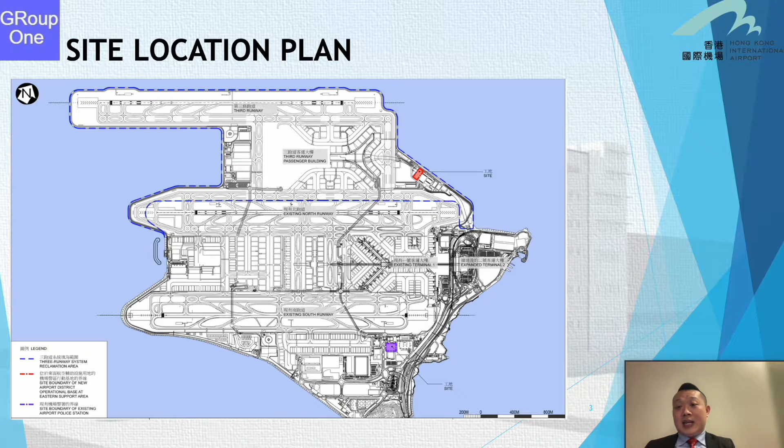I will introduce the project. Here you can see the project is located at the 3rd runway of Hong Kong Airport. Here is the location map.

Actually, to meet the growing air traffic demand and to maintain the competitiveness among different cities in the world, we need to build a new police operations center.

We are Group 1 construction company headquartered in Hong Kong. We specialize in various infrastructure projects. We have a well-reputed history and a well-structured organization, including the BIM teams and robotic teams.

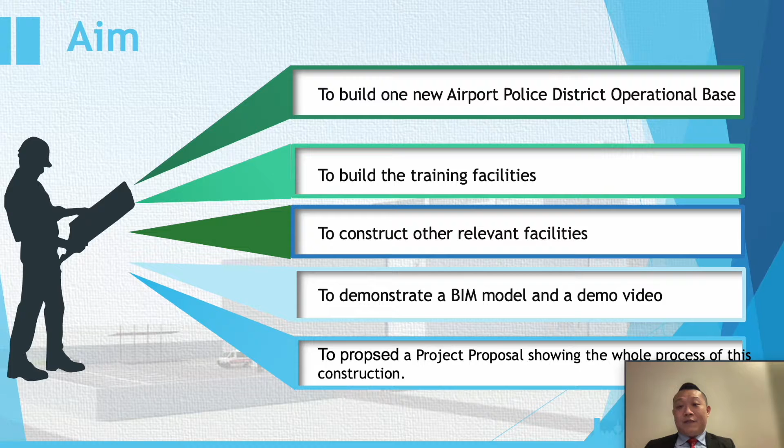Here is the aim of our project, which has 5 parts. And Marco will talk about the literature review.

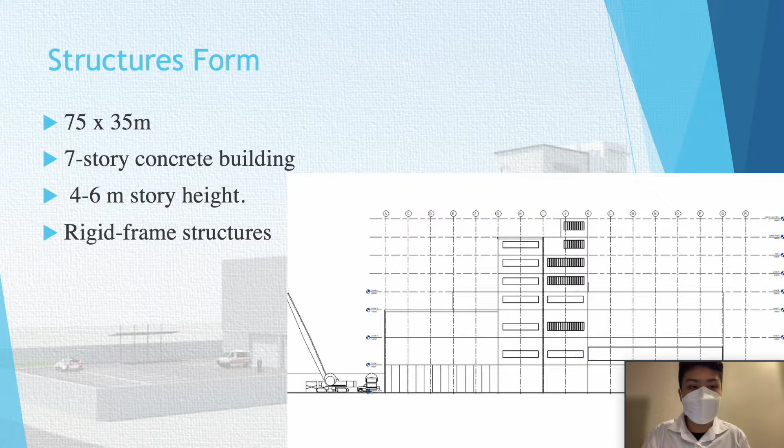Hello everyone, let me talk about the literature review. For the construction form, we suggest constructing a 7-story building. The construction method will be suggesting using the rigid frame structure.

The schedule management assigns dates to project activity, also including matching equipment, material and labor resources to project work. Also, our analysis method would be the critical path method.

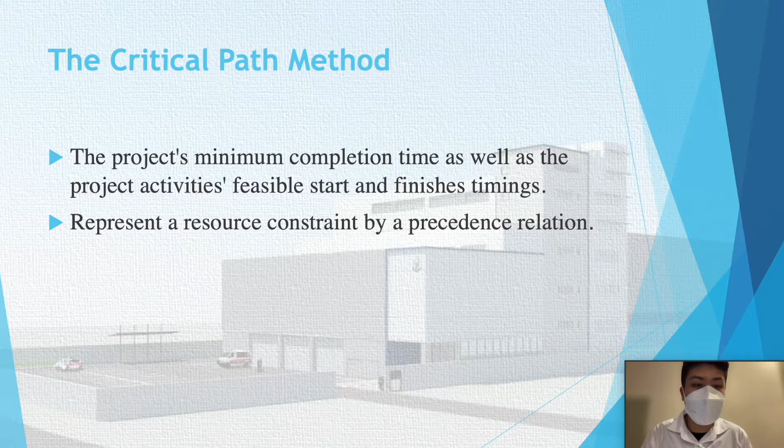Let's talk about the critical path method. This method determines the project's minimum completion time as well as the project activity start and finish time. Also, it can represent resources constrained by precedence relation.

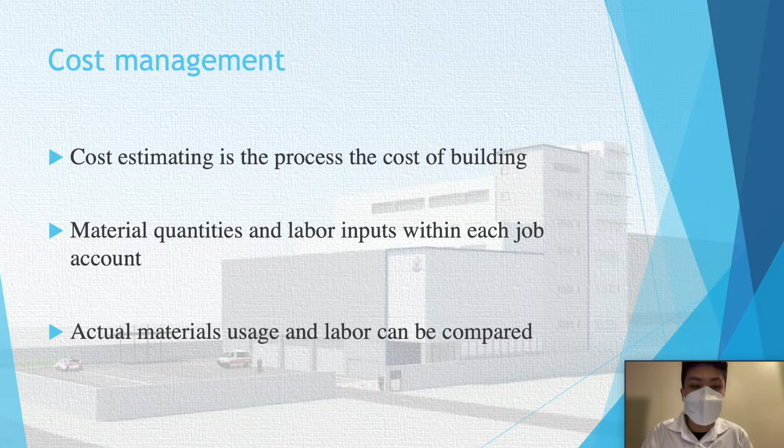Cost estimation is the process of estimating the cost of the building. Also, the information on material quantity and labor input within each job account is typically retained in the project budget. In this project, BIM will be used to build up a 3D model to demonstrate the construction details.

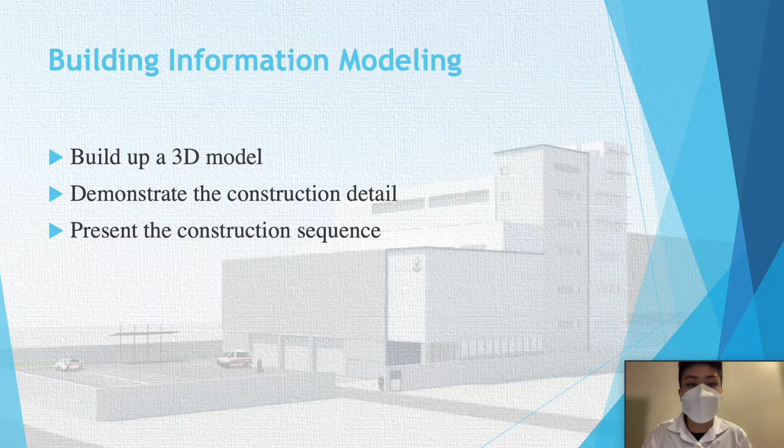and use the video to present the construction sequence. According to the regulation of the development department in 2018, we must adopt BIM in the design and construction of the project if the project is more than $30 million.

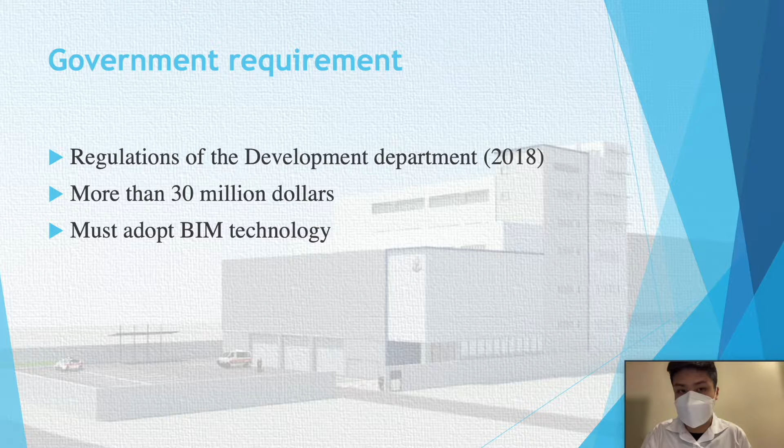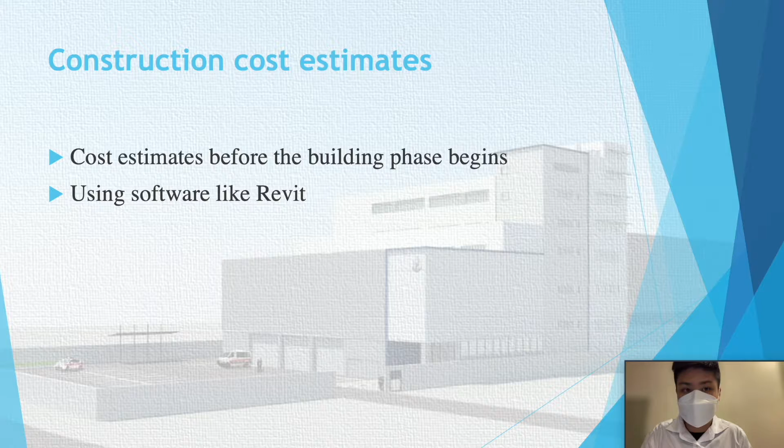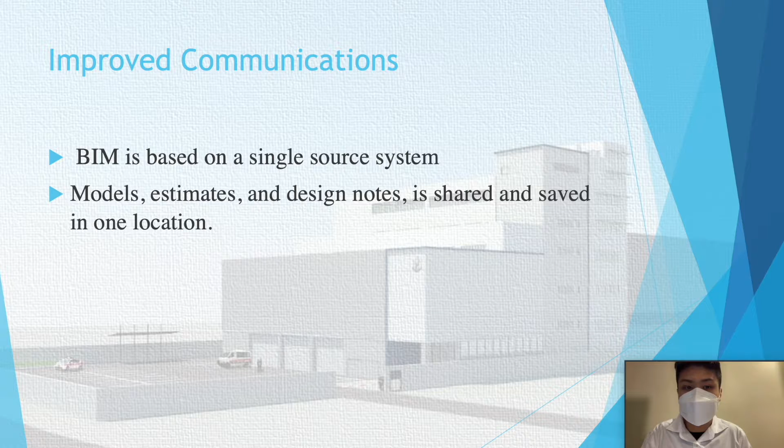Cost estimation can be done before the building phase begins using Revit with Microsoft Project. BIM is based on a single source system. All important information such as model, estimate, and design notes is shared and saved in one location.

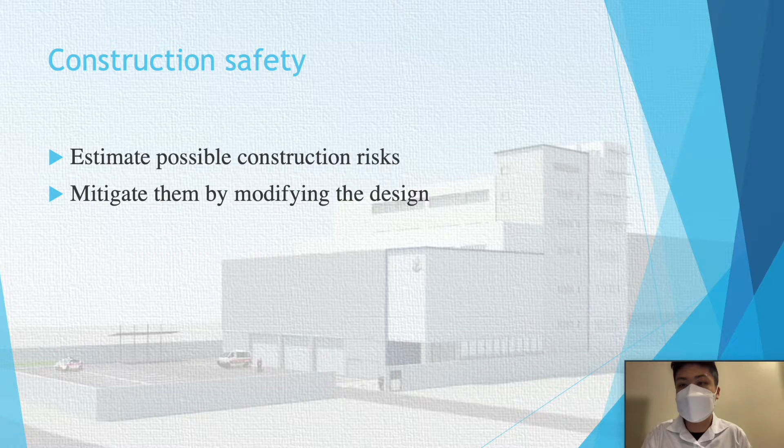Using BIM, engineers may estimate possible construction risks and mitigate them by modifying the design, so the safety of the construction may be better. Thank you very much.

Hi everyone, my name is Chun Hung. I'm going to introduce the methodology adopted in this project. First thing first is an overview of the methodology.

It mainly consists of 3 parts, which are the cost estimation, project scheduling, and BIM model. For the cost estimation, cost in terms of employment, material, and machines will use information from the Census and Statistics Department of Hong Kong, also the Hong Kong Construction Industry Employee General Union, and HKEX News.

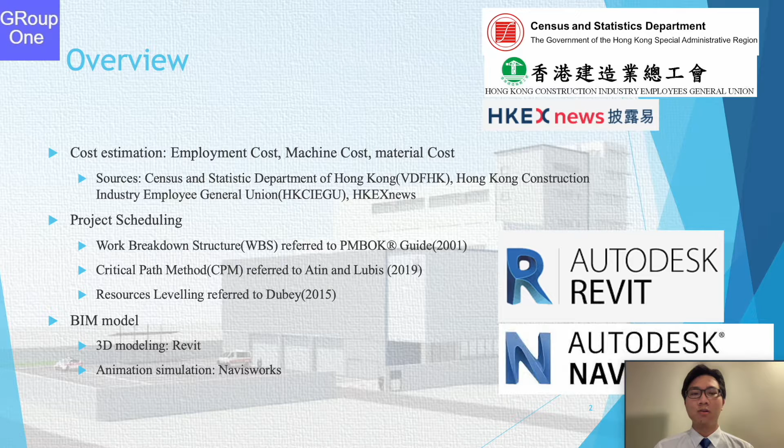For the project scheduling, the work breakdown structure will be referred to the PMBOK guide of 2001. The critical path methods can be referred to the methods proposed by Atin and Lubis in 2019. Then the resource leveling can be referred to the methods proposed by Dubey in 2015.

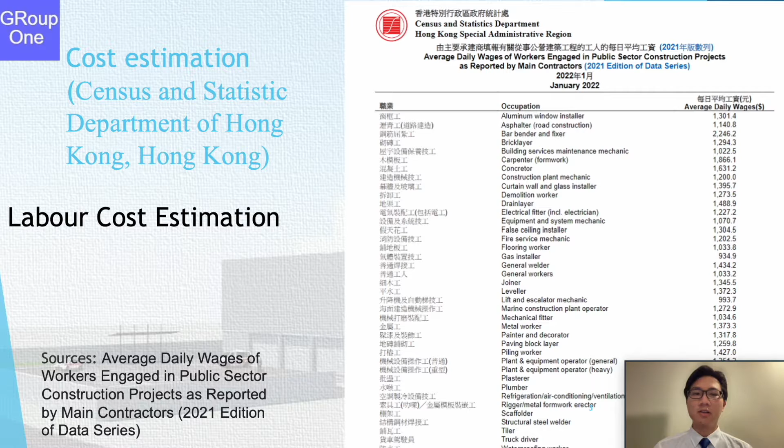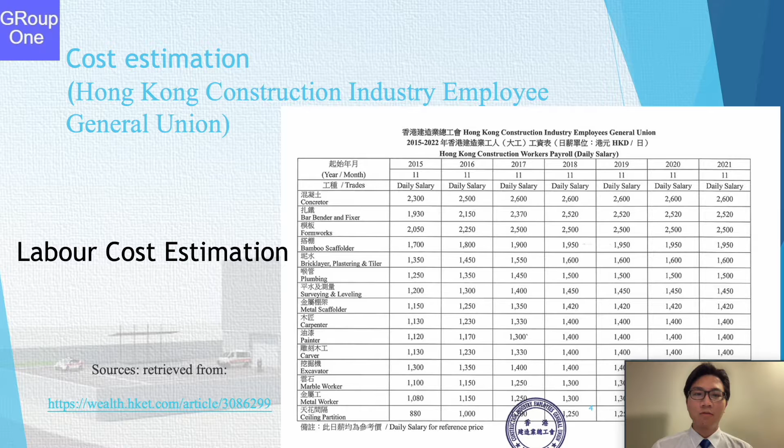So for this slide, this labor cost estimation report is extracted from the Census and Statistics Department of Hong Kong. This slide also shows the labor cost estimation, which is extracted from the Hong Kong Construction Industry Employee General Union.

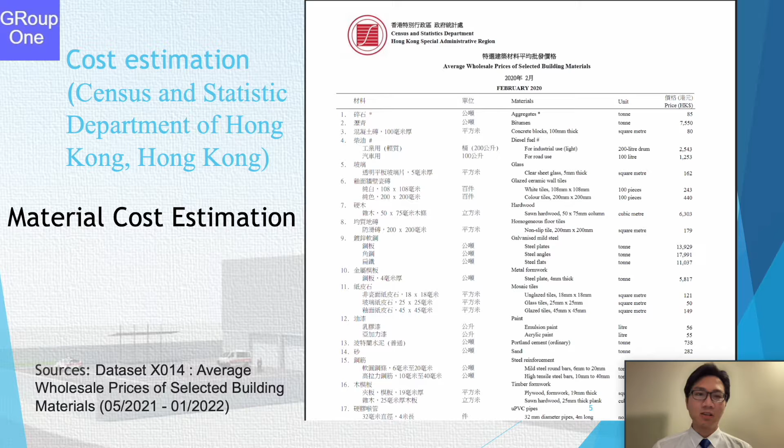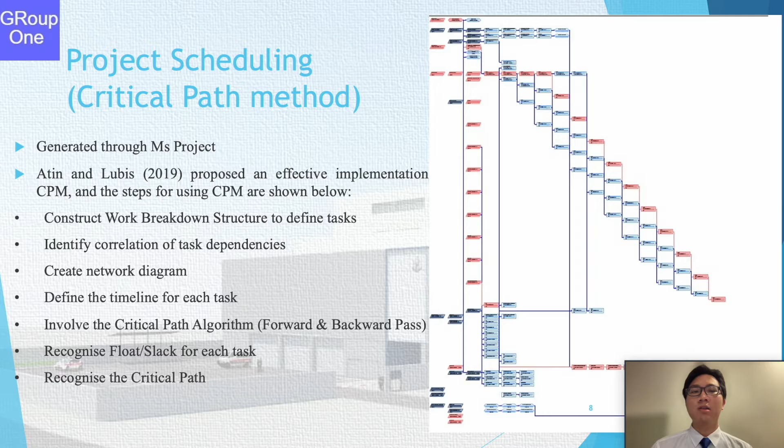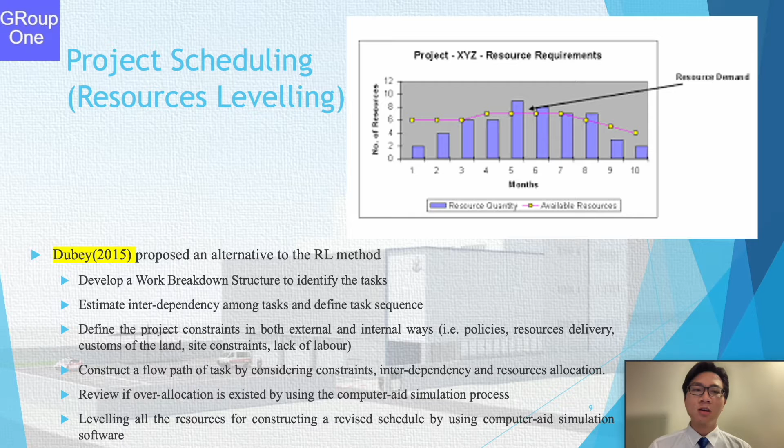So this shows the resource leveling, which uses the methods proposed by Dubey in 2015. And those are the steps for the Dubey method.

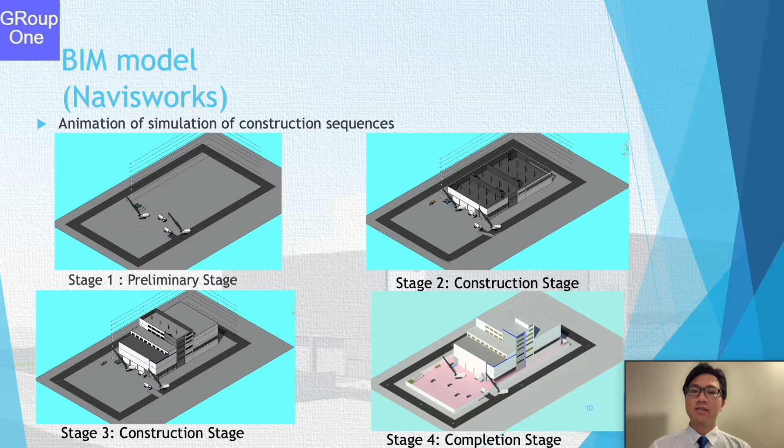This is the BIM model, and we divided the construction stage into 4 stages. As you can see, stage 1 is the preliminary stage, stages 2 and 3 are the construction stage, and the final stage is the completion stage.

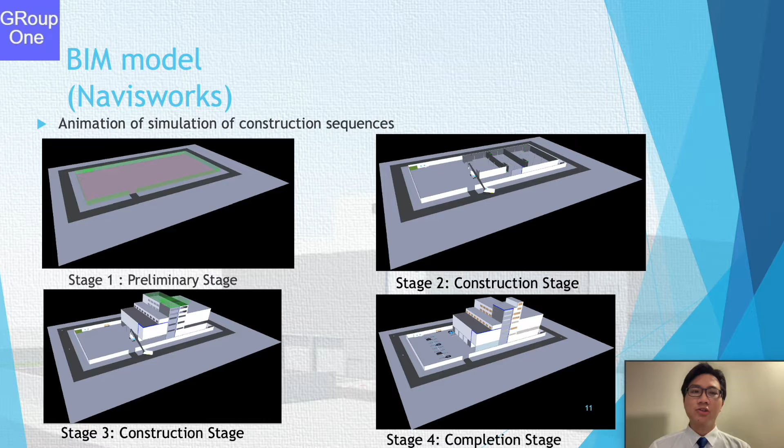Also, for the Navisworks model, it is used to simulate the construction sequence by animation. The animation will be generated automatically. So this is the animation simulating the construction sequence. Maybe you can have a look. Let's see whether it can be played.

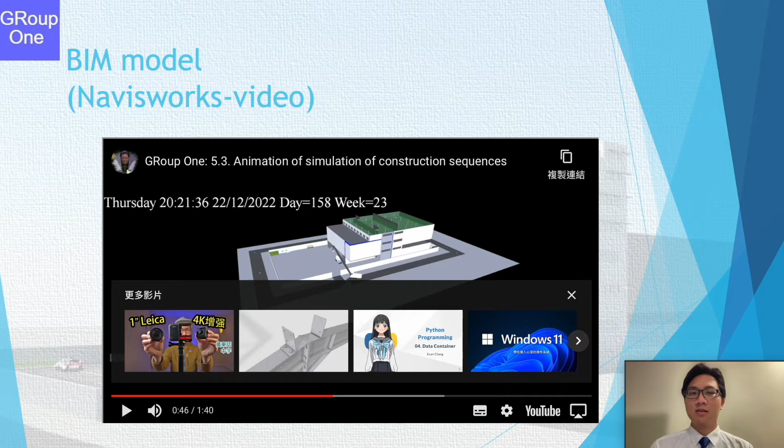So it's just a construction sequence. For the details, please refer to our group project. So that's it, thank you.

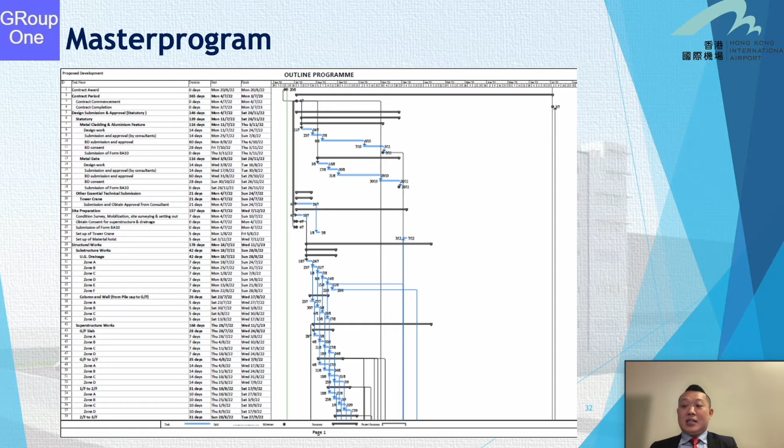In our project, we will use Microsoft Project to monitor the progress of the construction and estimate the construction cost. As you can see, the construction cost in this project is approaching approximately 124 million.

It is shown that the initial cost is relatively high compared to the latter cost because mobilization costs and initial investments are required to purchase the construction equipment at the beginning.

The milestone is shown in the table below, and the corresponding cost is clearly demonstrated.

The cost is composed as follows: we first input the resource cost provided from our company into Microsoft Project, then assign the resources to every single task, and the program will automatically generate the cost for every milestone.

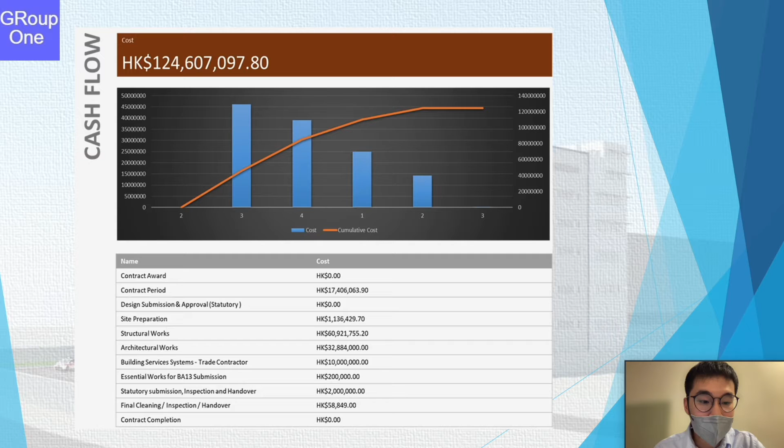This bar chart shows the cost distribution of our project, and this is the cost of the resources in our project. There are 3 major costs.

There are labor costs, material costs, and outsourcing costs. The labor cost is composed of the employment of site workers, site agents, and professionals, and the material cost is mainly composed of the concrete cost and the reinforcement cost.

And the third part is the outsourcing cost. Since our company is mainly working in the superstructure, the architecture and inspection work will be outsourced to other subcontractors.

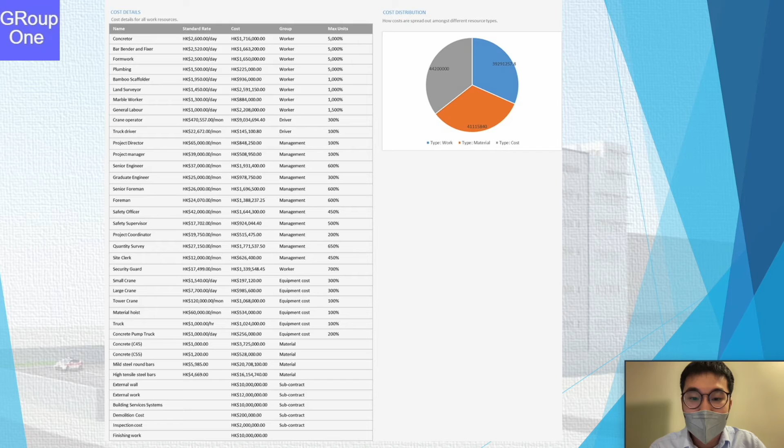This is the resource work availability report. Like other contractors, we handle various projects simultaneously. The usage of resources is constrained to avoid over-assignment in a single project. However, we will provide some tolerance for cases where we need to accelerate the construction progress.